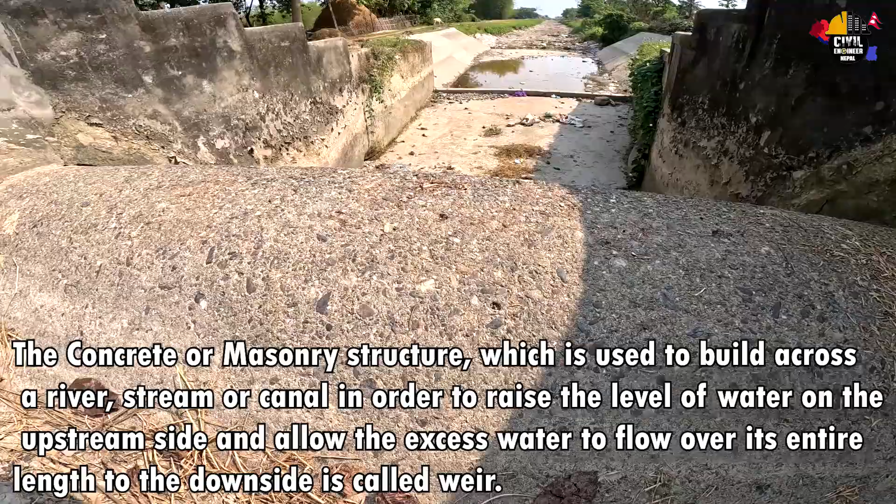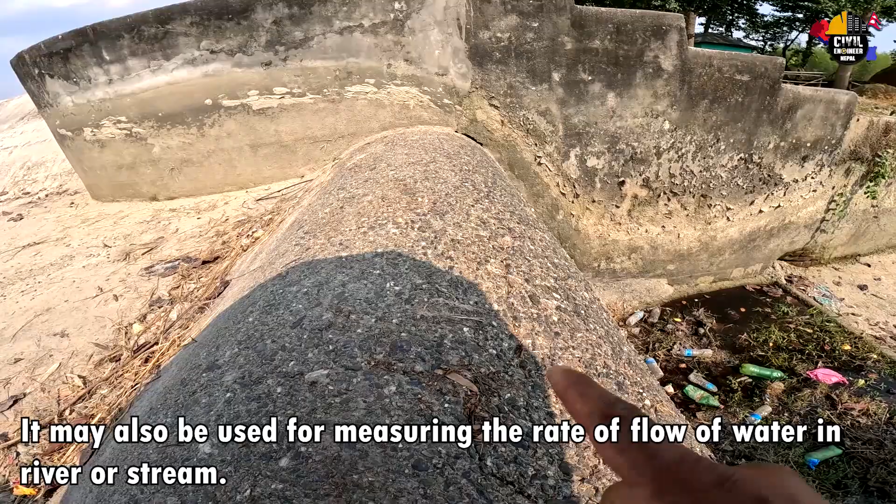So we can define weir as the concrete or masonry structure which is used to build across a river, stream or canal in order to raise the level of water on the upstream side and allow the excess water to flow over its entire length to the downstream side. It may also be used for measuring the rate of flow of water in river or stream.

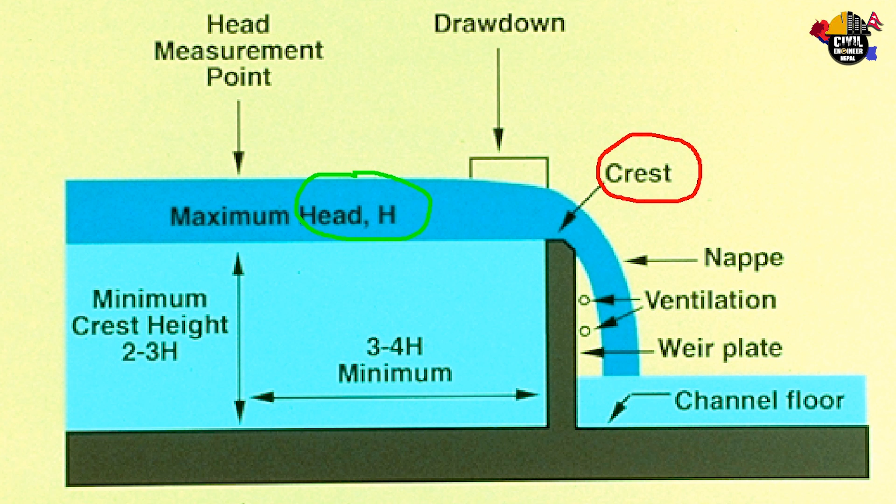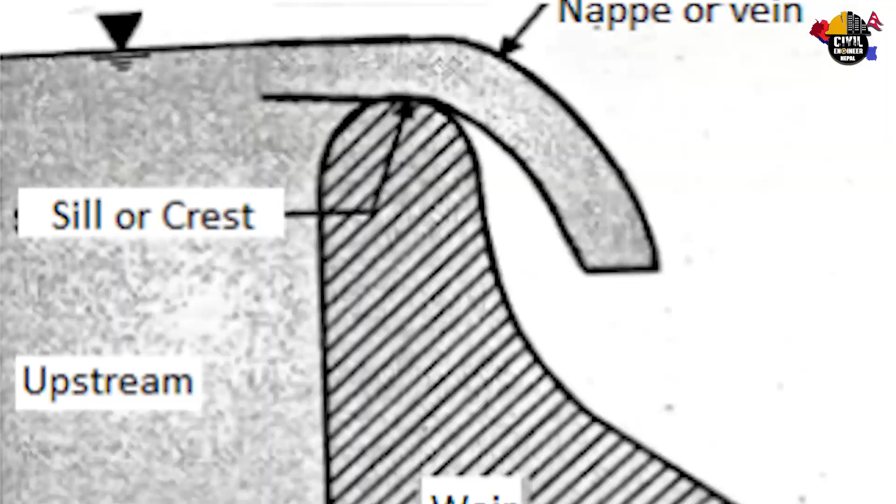Water flowing weir मा विभिन्न पार्ट्सहरू हुन्छन्। They are head, crest, nappe, ventilation, etc. अब crest को कुरा गरौँ। Crest: the bottom edge of the notch or the top of a weir over which water flows is known as crest. Crest may also be termed as sill. Okay, let's define nappe. A nappe is a sheet or curtain of water that flows over a weir, notch or a dam.

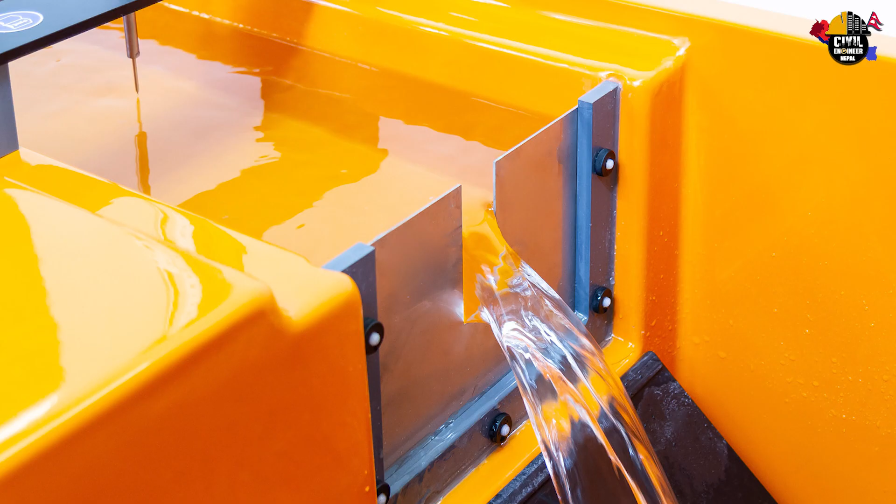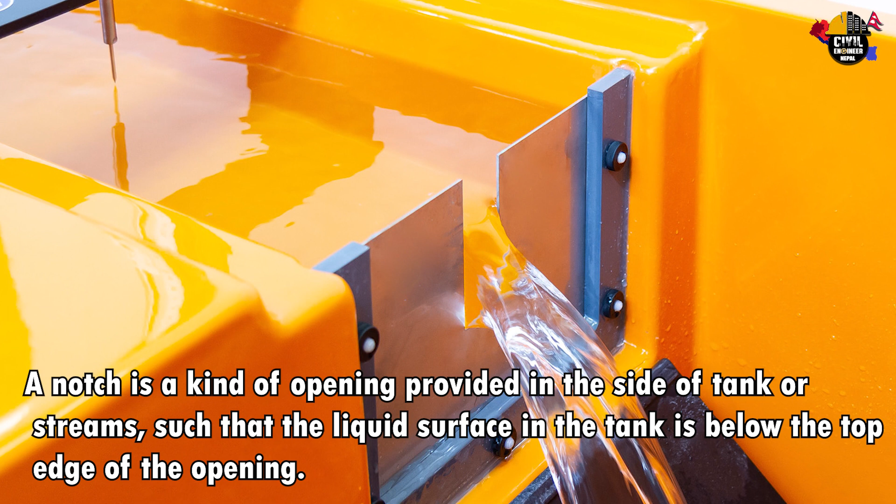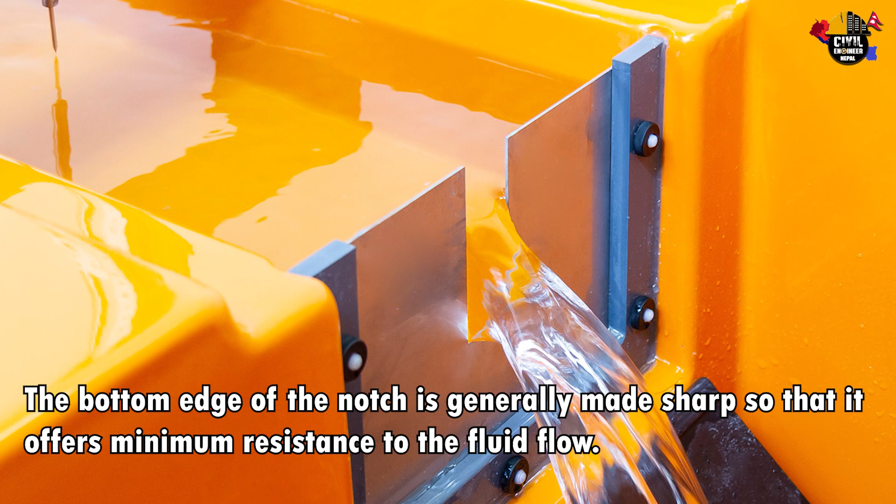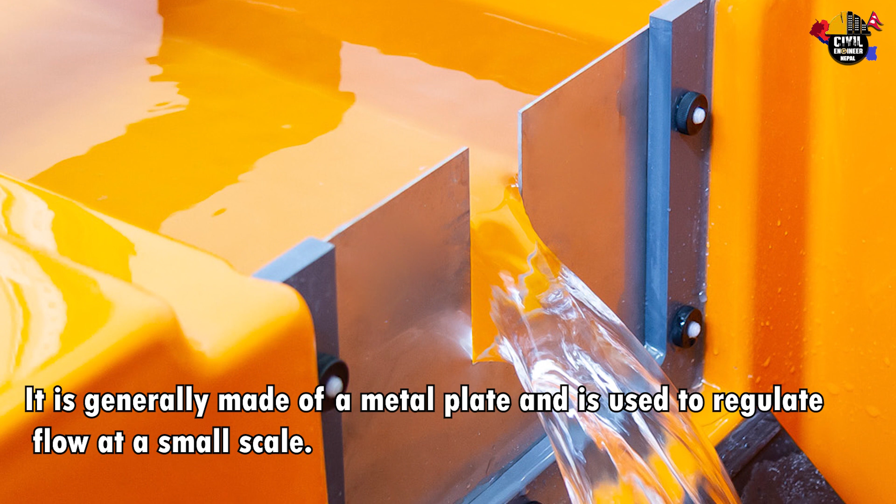So we can say that a notch is a kind of opening provided in the side of tank or streams such that the liquid surface in the tank is below the top edge of the opening. The bottom edge of the notch is generally made sharp so that it offers minimum resistance to the fluid flow. In general, notches are used for measuring the rate of flow of liquid from a tank or in stream or channel. It is generally made up of metal plate and is used to regulate flow of water at a small scale.

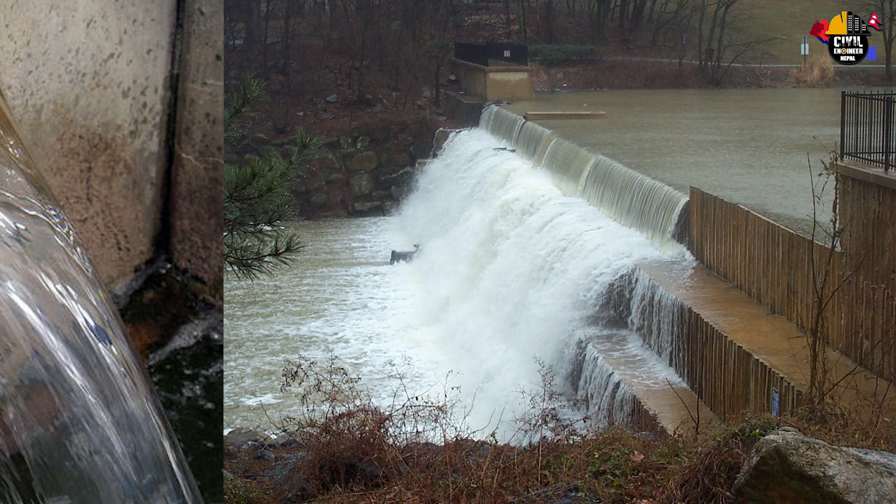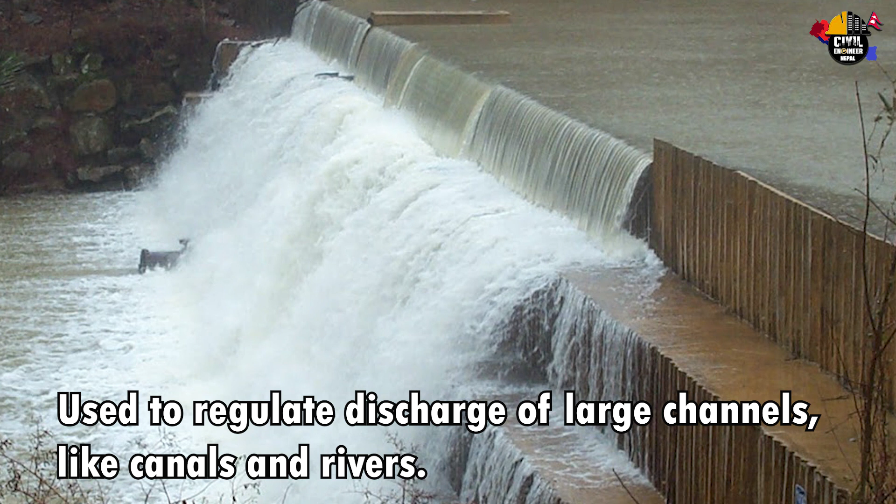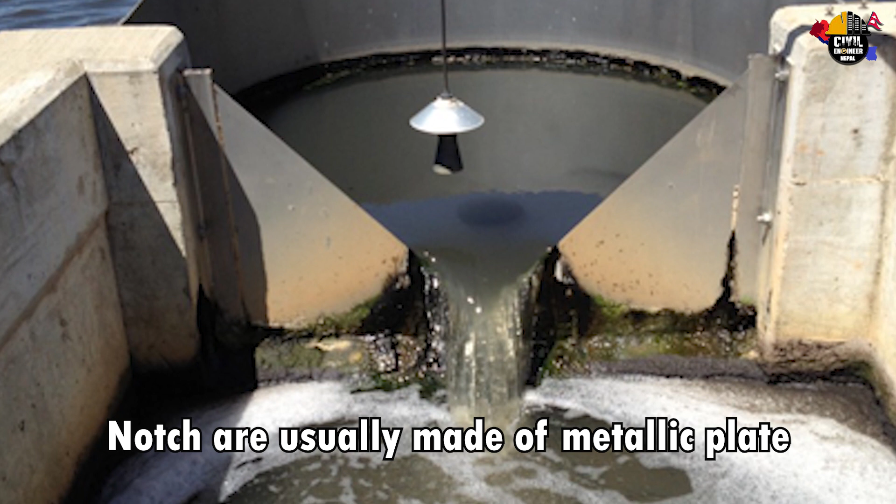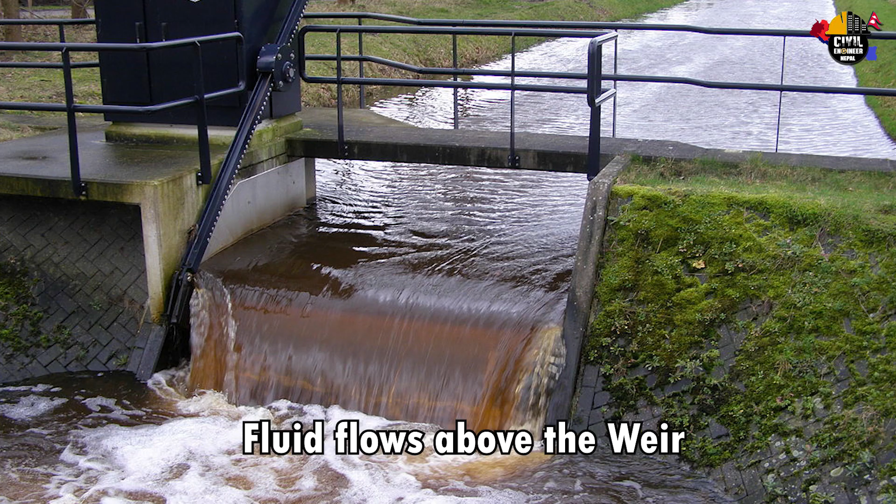Now let's discuss the difference between notch and weir. Notch is used to regulate discharge of small channels, whereas weir is used to regulate discharge of large channels like canals and rivers. Notches are smaller in size, but weirs are bigger in size. Notches are usually made of metallic plate, whereas weirs are usually made of concrete. In notch, fluid flows below the notch, but in weir, fluid flows above the weir.

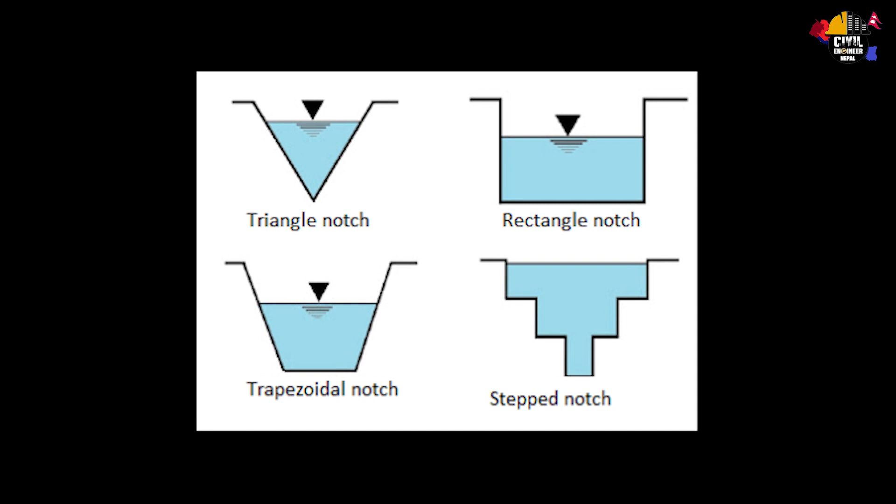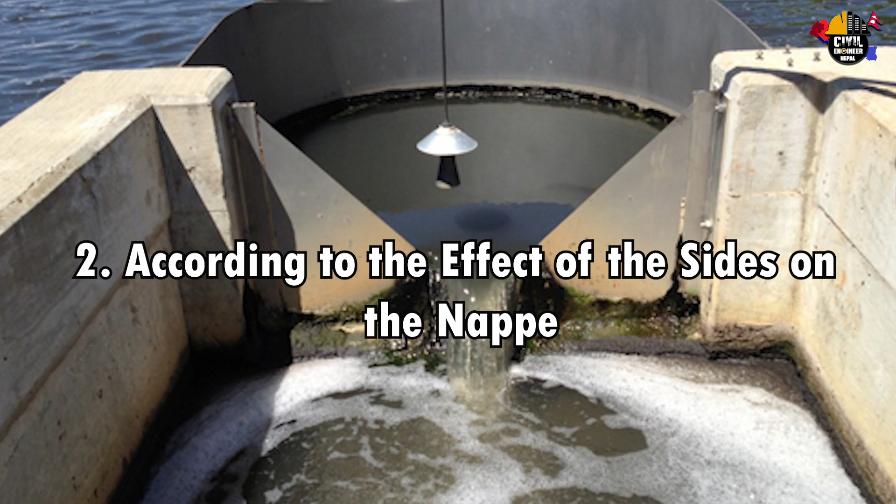Now, classification of notches. It has been classified as per shape of the opening and the effect of the sides on the nappe. According to the shape of the opening, notches are classified as rectangular notch, triangular notch, trapezoidal notch and stepped notch. And according to effect of the sides on the nappe, it has been categorized into two parts: A, notch with end contraction, and B, notch without end contraction.

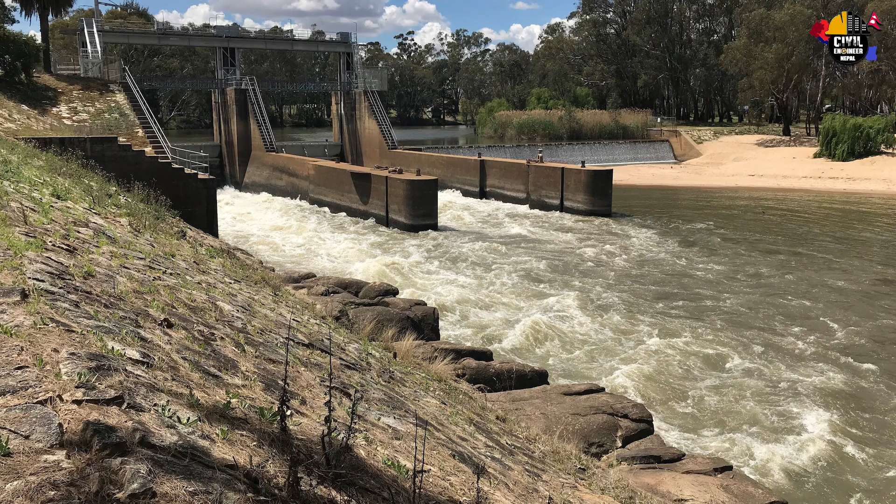In the same way, weirs have been classified into 4 parts. 1. According to shape of the opening. 2. According to shape of the crest. 3. According to effect of sides. 4. According to discharge condition. Number 1, according to shape of opening: rectangular weirs, triangular weirs and trapezoidal weirs, or Cipolletti weirs.

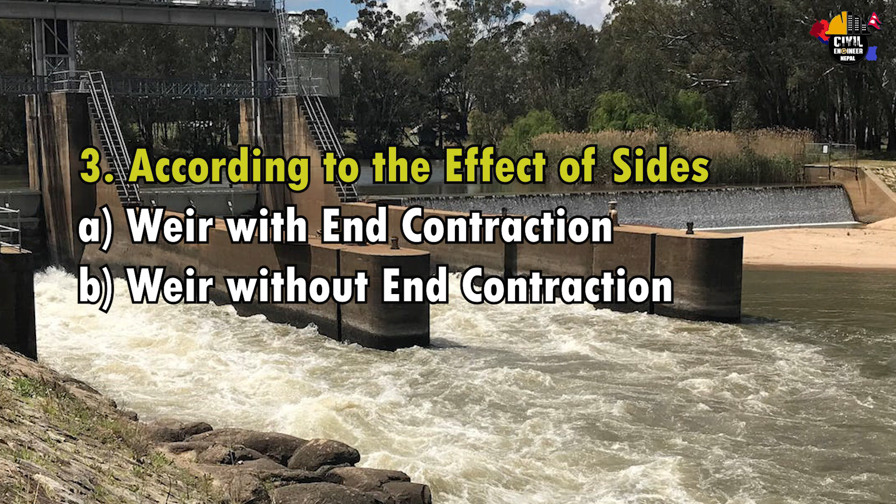Number 2, according to shape of the crest: thin plate or sharp-edged weir, narrow-crested weir, broad-crested weir, ogee-shaped weir. Number 3, according to effect of sides: weir with end contraction and weir without end contraction. Number 4, according to discharge condition: freely discharging weirs and submerged weirs.